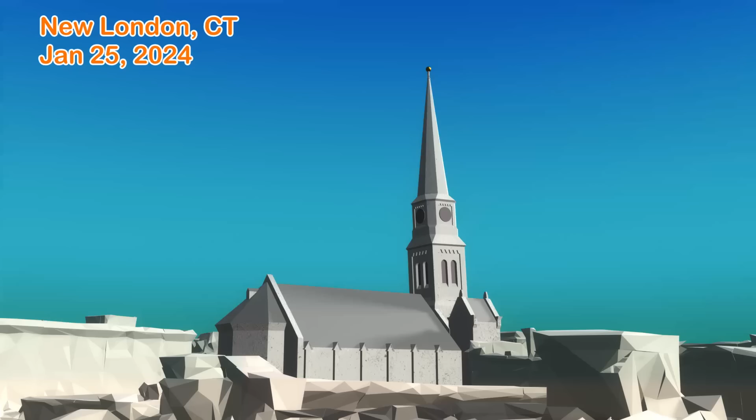This majestic stone steeple collapsed out of the blue on a random Thursday afternoon. I managed to get hold of the high-resolution security footage, which delivers valuable insight into the increasing lean of the steeple up until its eventual collapse. It provided measurements of the progressive tilt. And what warning signs were there that it was teetering? It's both unsettling and fascinating.

The steeple of the First Congregational Church in New London, Connecticut, had a lean ever since it was built, and those with a keen eye would have noticed its subtle but ominous tilt. A little more than 2.5 months ago, at 1:30 p.m. on January 25th, it fell, destroying much of the building.

Fortunately, nobody was hurt. To me, the situation resembles a recurring pattern, a client opting for a builder offering a price too low and paying the cost in compromised construction. In this case, the resultant mortal weakness took 173 years to reveal itself.

Leaning architecture stirs emotions of both apprehension and wonderment. Humans have always found it irresistible to build high and tall, fueled by competition, vanity, and the challenge of pushing the limits of engineering. Sometimes they are askew by design. This towering steeple, soaring at 150 feet high, claimed the victory as the tallest in town. It was a lot taller than the length of the church.

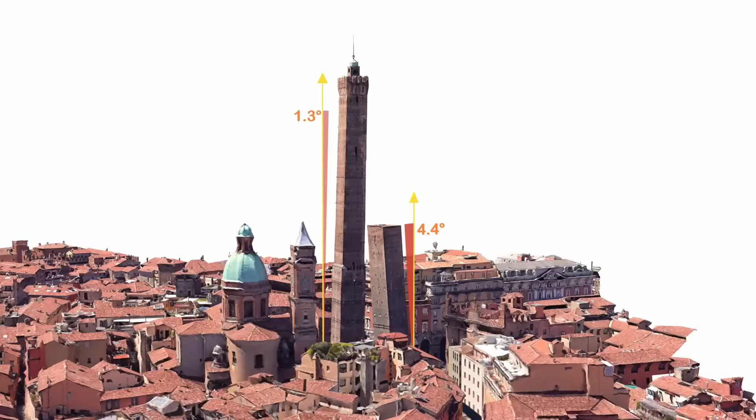Some tall, older buildings have extreme leans, which are famous worldwide and large drivers of tourism. Take, for instance, the Two Towers of Bologna. They are comically lopsided and a phenomenal 910 years old. The shorter one has the more extreme gravity-defying tilt of 4.4 degrees. In the 14th century, it was shortened as its lean had become too dangerous.

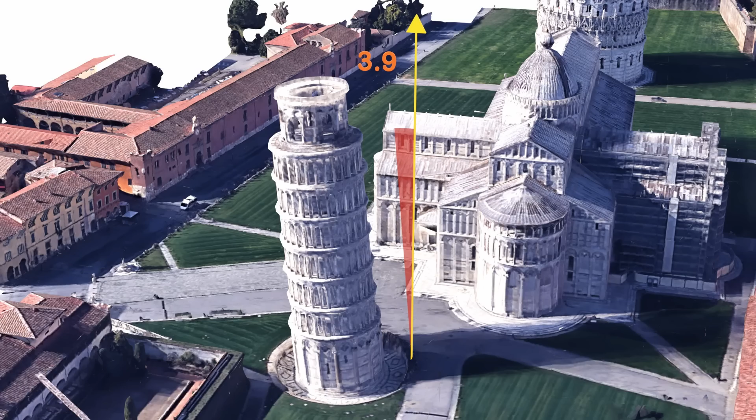Also in Italy is the most famous of all, the Pisa Bell Tower, which leant as much as 5.5 degrees 30 years ago, and has been straightened by engineers to 3.9. Completed in 1372, it has been standing for a staggering 650 years. This crooked spire in Chesterfield, England, is as old as Pisa, and its decidedly wonky look has made it a beloved local icon.

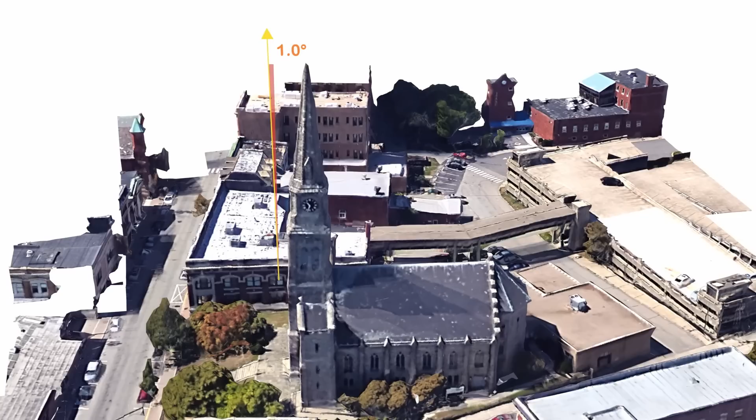This collapse would not have been a surprise to its original architect, Leopold Eidlitz, who in a letter back in 1851 issued a stern warning to the church about the unstable steeple. He wrote, "The walls of the main tower of your church have parted in several places, in consequence of defective masonry and unequal settling produced by want of sufficient bond in the walls and the hurried erection of the steeple."

He advised that the spire be taken down and rebuilt by someone more competent. The church voted to take no action. The unequal settling he talks about implies it was tilting at completion, and I believe this bad masonry is the reason for the collapse. Let's look closer at the church and its layout and composition.

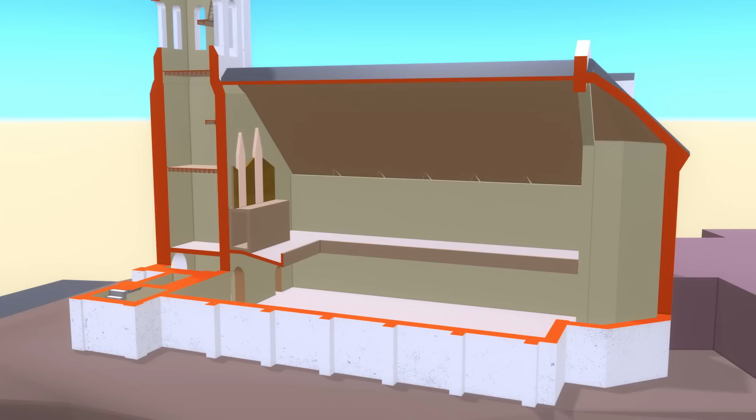It was modeled from a ground plan and the Google 3D mesh, and from photographs. The two main components were the 3 entry towers and the main church volume. The structure was load-bearing granite stonework and masonry. Ornate roof trusses supported a slate roof over the sanctuary. The main space had an elevated seating gallery, which also contained the organ against the steeple wall. We will look closer at the organ and how it may have played a part.

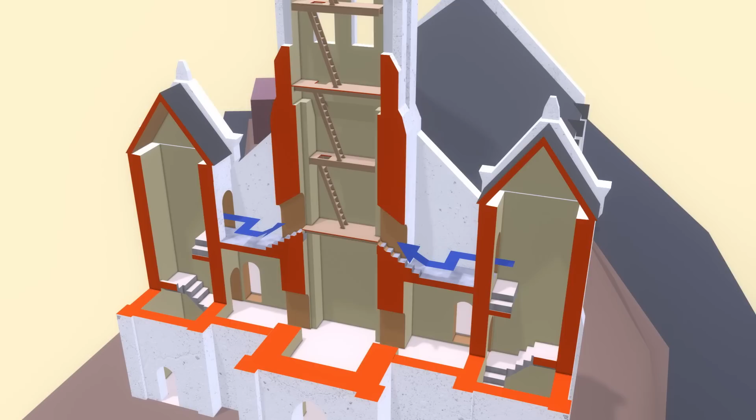The main entrance was at the base of the steeple. The side towers contained stairwells accessing the upper seating area. They were also the way to reach the bells and clocks. The stairs to the steeple were accessed from balconies on either side. The belfry and clock room had wooden frame floors. They were reached by ladders and timber platforms.

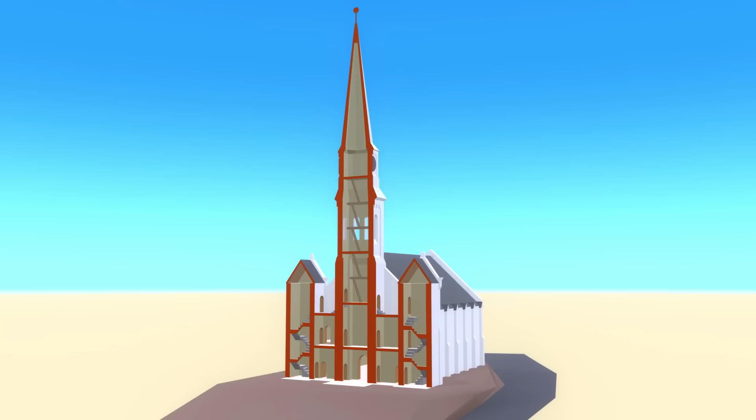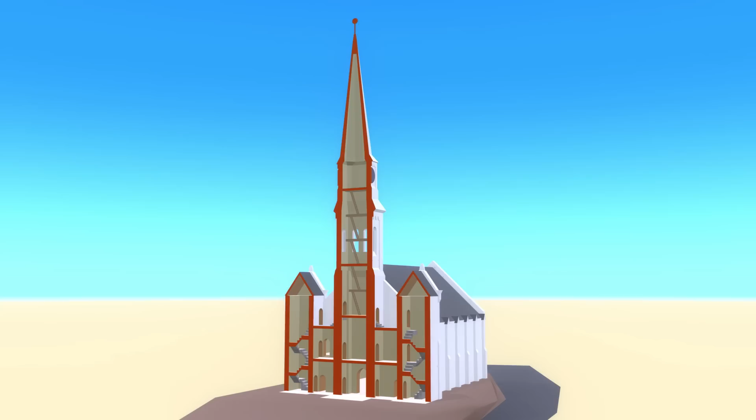The stone walls of the tower started out thick at the base and progressively thinned out as it rose to provide structure where it was needed lower down while simultaneously reducing the load. The church did have a basement, but I could find no detail on its extent, so it's not shown in the model. But there is no reason to think that the basement contributed to the collapse because all clues in the video evidence point to a failure higher up, and the foundations were securely onto bedrock. Much of the granite was quarried on site.

The upper parts of the spire around the louvers of the belfry and the clocks have been modelled in greater detail. These features are clearly visible in the security video, providing more cross-reference points to accurately align the model with the motion seen in the video.

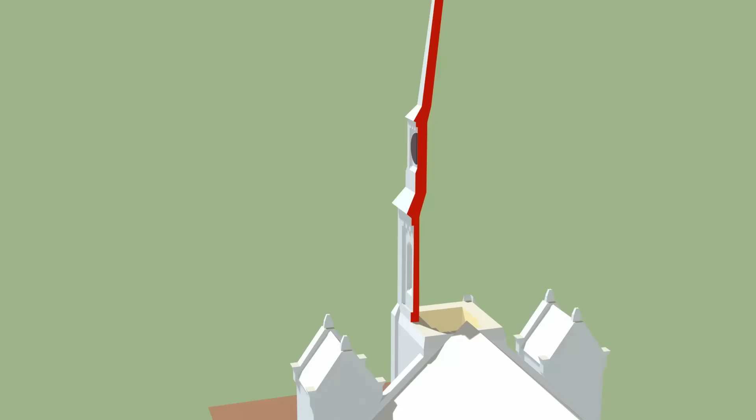Additionally, we can appreciate the intricate elegance of the stonework. Steeples like this are organized with a satisfying geometry ordered in eighths. The symmetry mirrors along 4 axes to complete a full rotation of the square plan form.

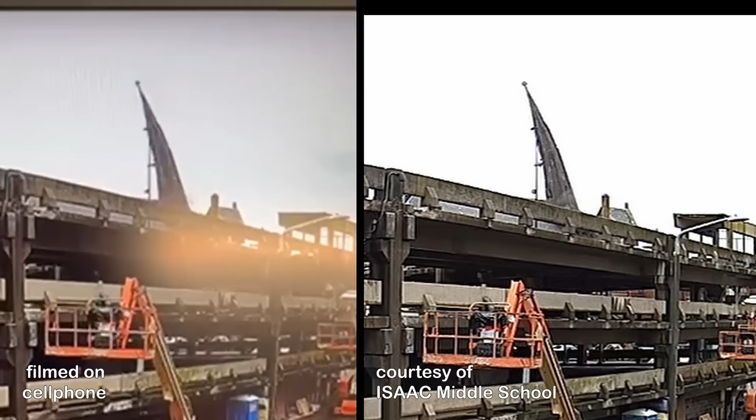Thanks to the Isaac Middle School, I have got hold of the original footage that captured the collapse on security video. The widely seen initial collapse footage was fuzzy and shaky. Recorded via a cell phone capturing a computer monitor, it suffered from camera wobble, keystone distortion, and unsynchronized frames, impeding precise measurement and analysis.

With the benefit of the sharper imagery, it was possible to extract valuable measurements of the tilt angle. Plus, the video includes the crucial 24 minutes leading up to the collapse, allowing for the tracking of small changes of the lean. In addition, I was provided with still images spanning the 10 days before.

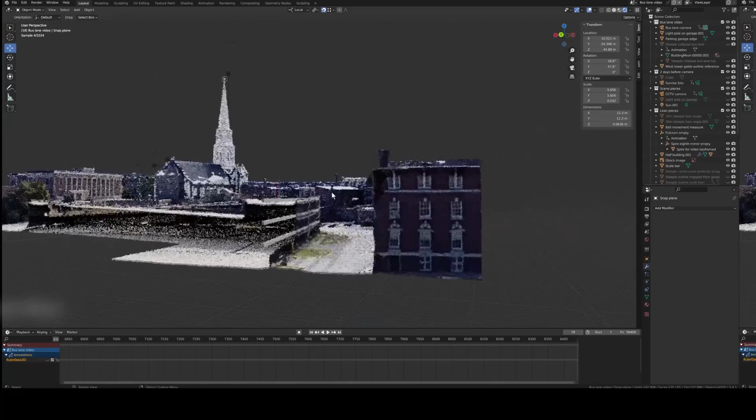This is the process of tracking the steeple movements. The 3D model had to be precisely aligned with the video. The viewpoint of the camera had to be matched and the fisheye distortion of the lens replicated. For the most accurate tilt measurements, it was essential that the image and the model had the same horizontal alignment.

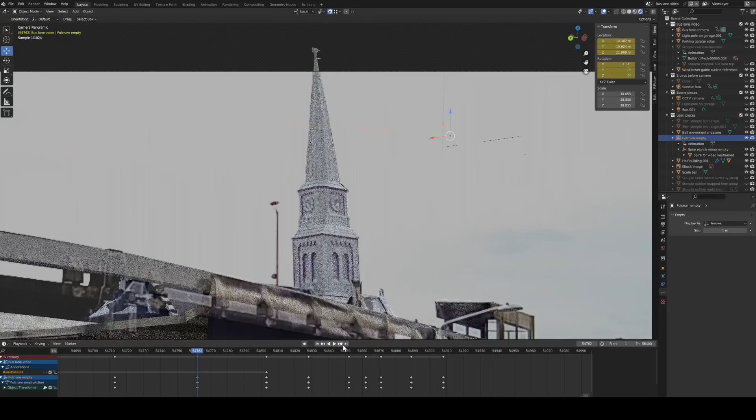The parking garage on the left and the buildings on the other extreme of the image were aligned to ensure the correct calibration. The tilt seen in the security video was very carefully matched frame by frame to the 3D model to recreate the increasing tilt.

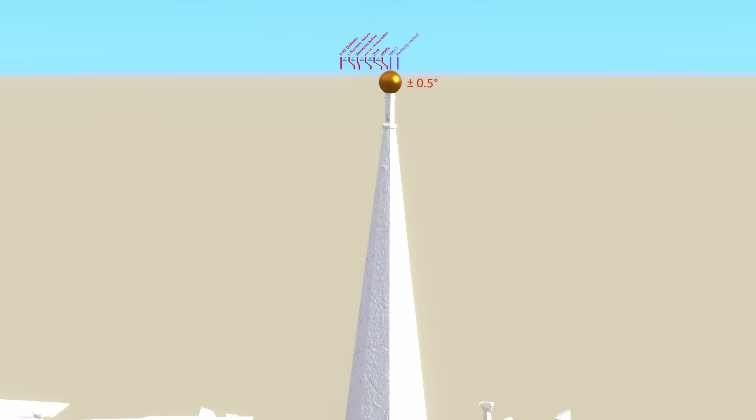This is the progression according to my measurements. The gold sphere is the best place to illustrate the progressive angle of lean over time because the movement is most pronounced at the top. On a side note, this type of ball on a spike is found all over Prague, which was where the architect grew up and drew his inspiration.

I don't think the spire was ever perfectly vertical. The unequal settling Eidlitz spoke of implies it was already tilting at construction. My guess is the original lean was similar to the 0.6 degrees we see in the 1930s image. By 2019, the tilt was about 1 degree according to measurements taken from a Google 3D mesh and a 2014 photograph. In the last 4 years, it moved another 15 inches, with the majority of this movement likely occurring recently.

In the 10 days leading up to the collapse, there was a further roughly 17 inches of movement. In the last 24 minutes, it leaned over by a further 7 inches. Here it is sped up. And in the final 1.7 seconds, the ball edged over by 19 inches before it reached its tipping point. The movement was exponential, imperceptible at first, and quickening towards the end.

The roof and stone were separate structures and independent. This is clear when we see how the roof stayed up for a moment while the stonework was dropping. The timber roof shows remarkable strength and only gave way when crushed by the much heavier stones. During the fall, the tip of the spire cracked loose and fell separately.

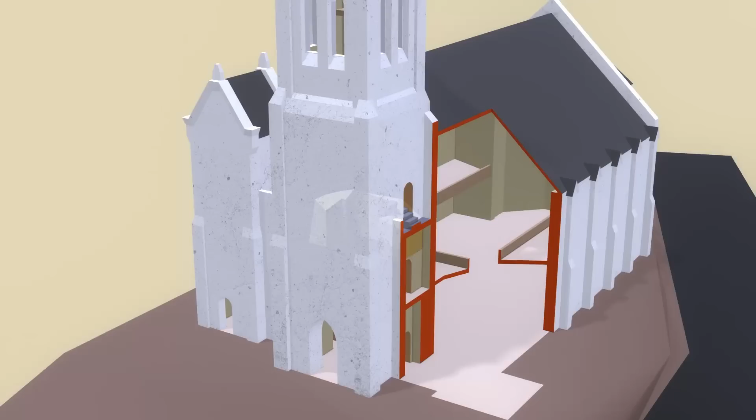I believe the pocket of masonry with poor bond was in the vicinity of the belfry stairs. We see no clear signs of compromised stonework in the photographs of the outside wall. This is not altogether surprising, considering that the likely weakness was below the roof line and the fulcrum.

Were the building owners aware that their steeple was so precarious and unstable? In 2011, the previous congregation commissioned a condition assessment study prepared by a firm of architects and engineers, which contains additional clues to the point of failure. Shockingly, the report declared, by all visible accounts, the tower is structurally sound.

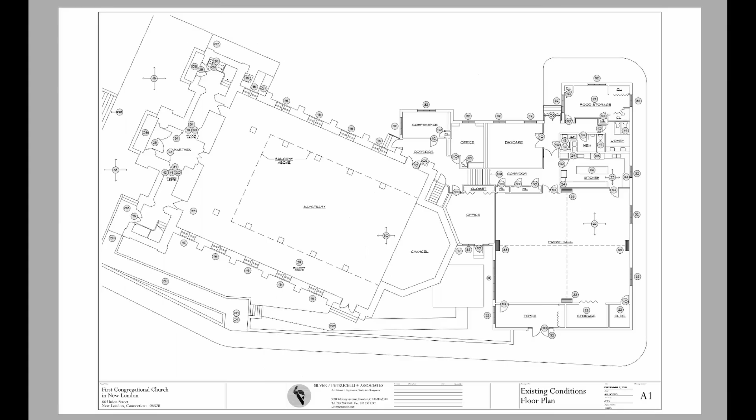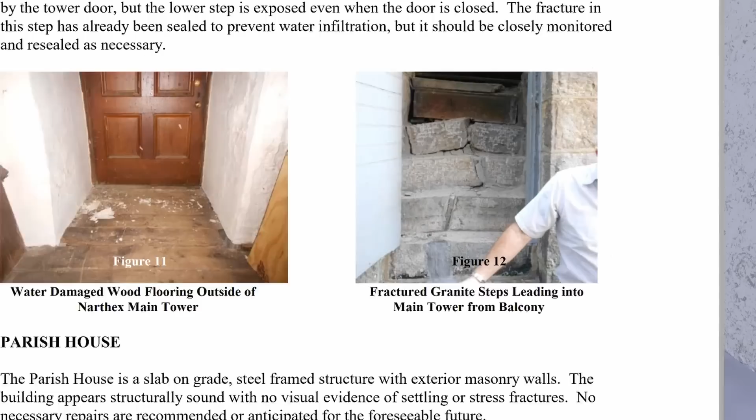The firm employed electrical, AC, and plumbing engineers, but no structural. So it is odd that they declared this tower structurally safe. This would surely have put the church at ease, but an architect is not qualified to make such structural determinations. The report included this troubling photo of the stairs to the bellroom. The stone treads had heaved down the center in this aggressive and very worrying manner.

This points to the primary structure having shifted in a significant manner, something a structural engineer should have investigated further to determine how severely the primary structure was compromised, particularly because the tower had a tilt.

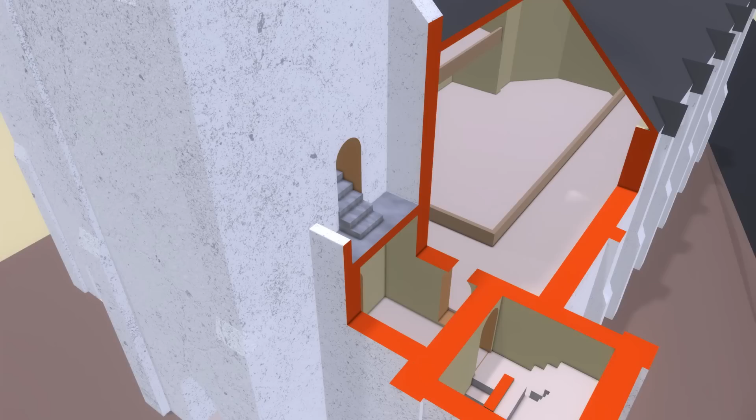The report also said, the areas in greatest need of repair are the floors, walls, and ceilings on the narthex upper floor, which was severely damaged by prolonged water damage, likely due to leaking roofs at the tower balconies. A leak to this type of flat roof can be particularly stubborn and notoriously difficult to locate and fix.

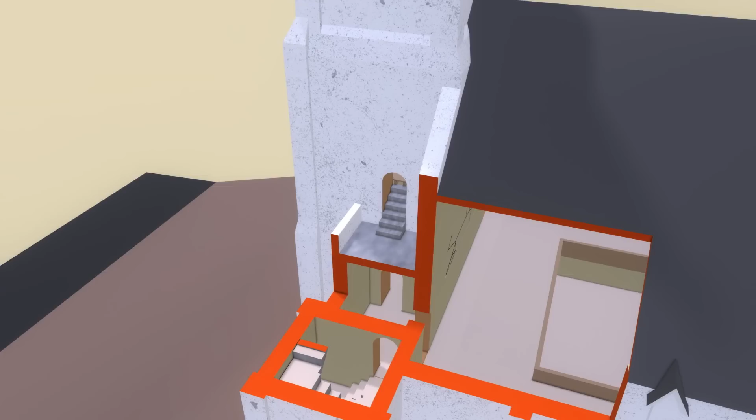These long-standing leaks could be what further degraded the mortar bonds in the area of shoddy construction the original architect was so concerned about, weakening it to the point of complete failure. Unable to afford the costly repairs, in 2015, the church sold the building to the current owners, Engaging Heaven Ministries, who finally had the roof fixed.

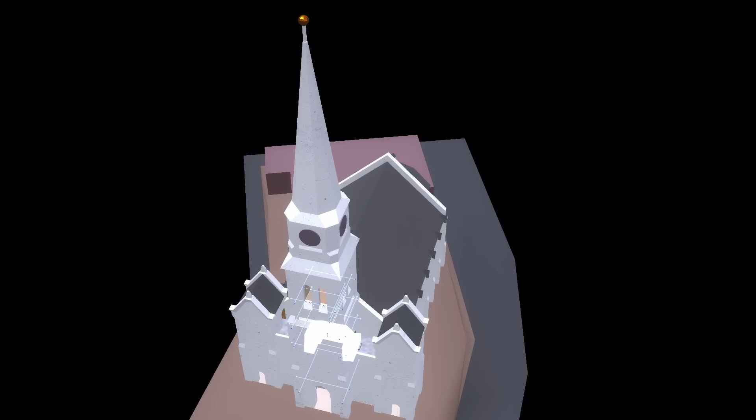No doubt, this 2011 report will be closely scrutinized by the insurers because it likely put the building owner unrealistically at ease and may have reduced the premiums. An organist described seeing tremendous water damage along with buckling door frames. It's possible a crumbling wall could have been obscured behind the organ, so nobody noticed to raise the alarm.

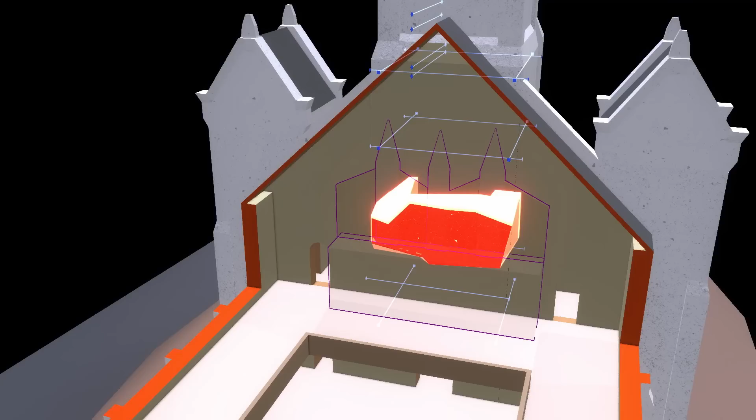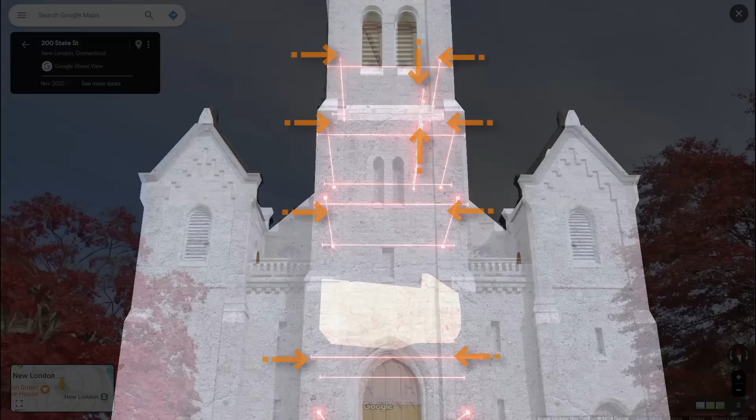All these issues are in the general area of the heaved stairs and the balcony and roof leaks. Unequal settlement of the masonry in this spot would have induced the tilt. Eidlitz added anchor ties in 1851, and in his words, they were there to stay the progress of the parting of the walls. He noted the ties were a temporary solution. All the anchor ties were added soon after construction.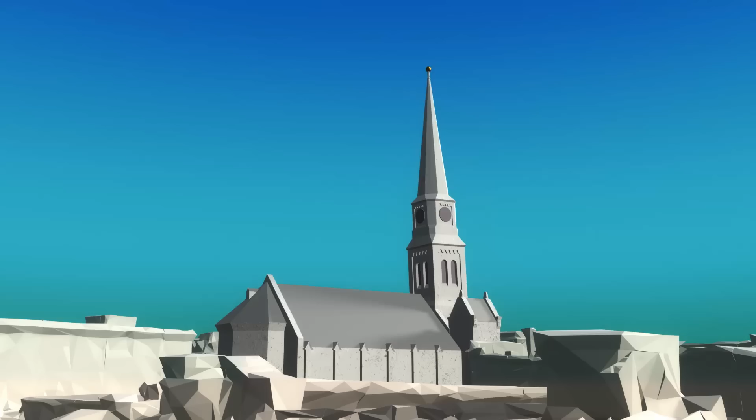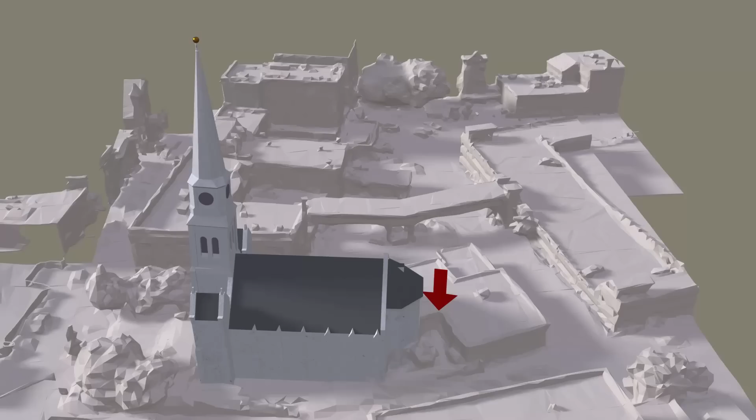This historic landmark tumbled into a pile of stones and wood, with a huge dust cloud which travelled down the streets. The sound was described as not so much a boom, but rather as a cascade of something heavy or as a rumble of thunder. The church administrator was working here in the annex. She heard a whoosh and carried on working till she was told the church had fallen down. She was the only occupant and was uninjured.

The balance of the structure remained standing, which tells it was strong and well built, and the failure came from a localized area of poorly and hurriedly constructed stones. The city condemned what was left standing, and within a week the demolitions were complete.

With such an unexpected collapse, you may ask what warning signs there were. Somebody who was admiring the church earlier that morning saw large stress cracks in the granite blocks on the entrance facade, as well as pieces of stone lying on the ground. 5 hours later, it was a pile of rubble.

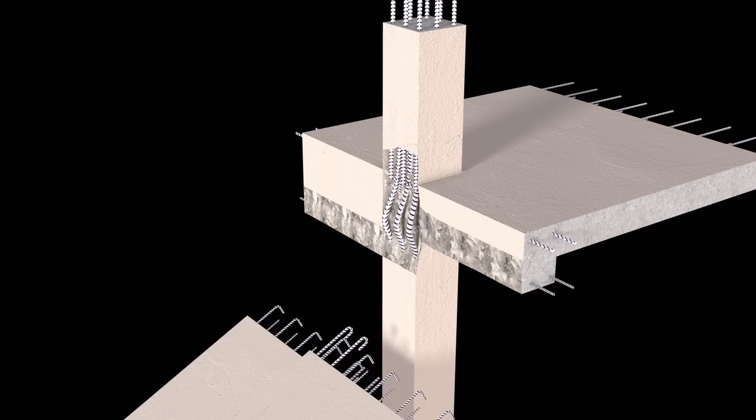The message is we can't assume the structure will be shouting out its distress, which was the same in the completely unexpected collapse of the Surfside condo in Florida, which I have made videos about. Sometimes there are only subtle clues. And the other troubling lesson is experts can miss these clues. In this case, monitoring of the steeple would have detected the accelerating lean and called attention to its dire situation.

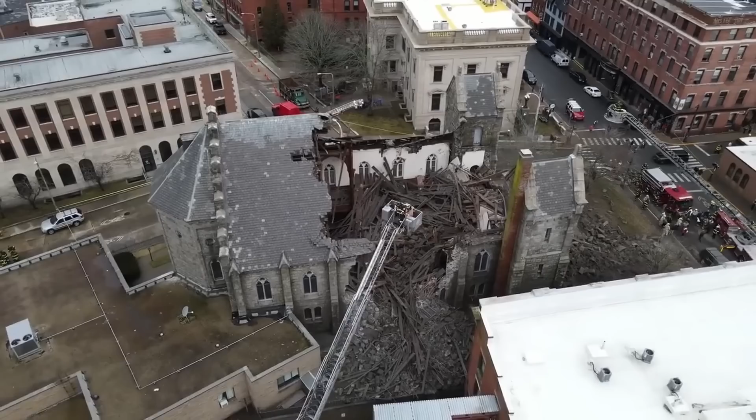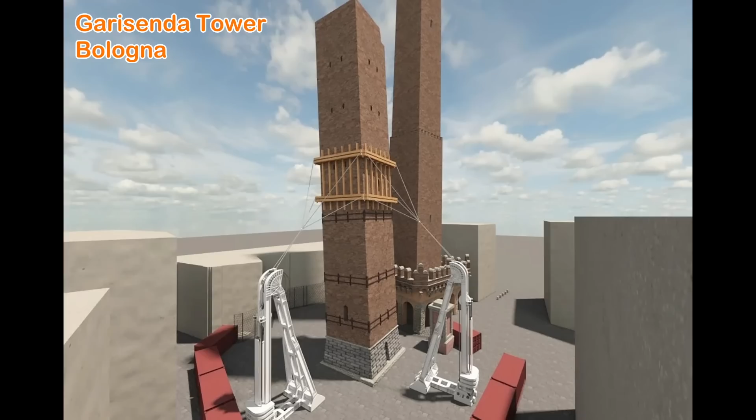As historic structures age and the financial resources of churches dwindle, this problem is going to compound. The cost of preserving history will surely fall increasingly on the ratepayer. That or our history will slowly crumble. The iconic towers, like those in Pisa and Bologna, suffer from foundation failures, and there are now efforts to stabilize one of the towers in Bologna.

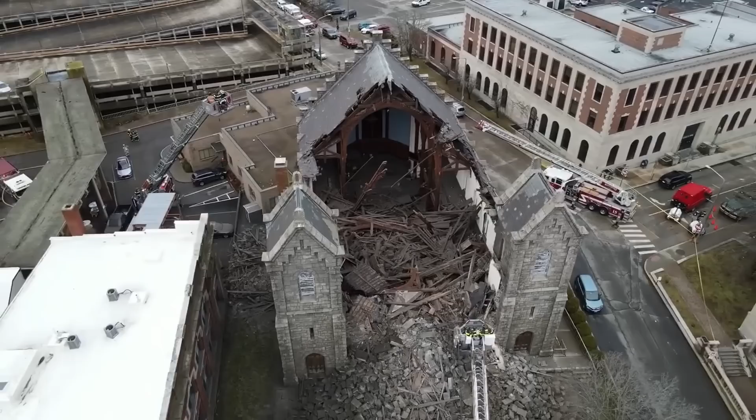The First Congregational is different because it was founded securely onto bedrock. This church was an otherwise robust structure except for localized weak masonry under the heavy teetering steeple. A tilt is not in itself a sign something is going to fall, but it does mean it must be checked out by someone with expert knowledge. The city has commissioned an investigation into this collapse. They have access to all the detailed information, and we look forward to their findings in the final report.